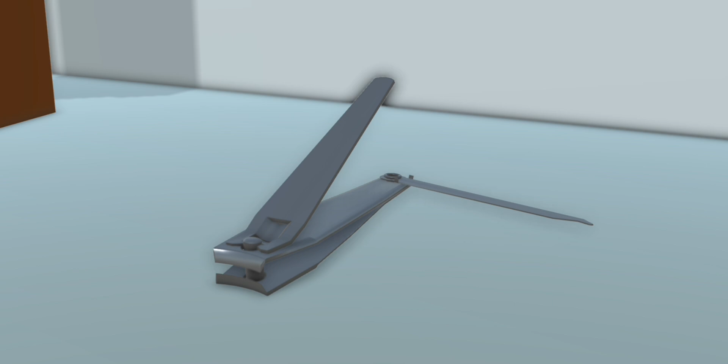This is a lever-type nail clipper, or simply known as the nail clipper. Every neighborhood has this small tool, and everybody knows what it's used for, and how to use it. But have you ever wondered how this simple tool works so efficiently? Today, let's explore the genius behind the lever-type nail clipper, from its design to the hidden mechanism.

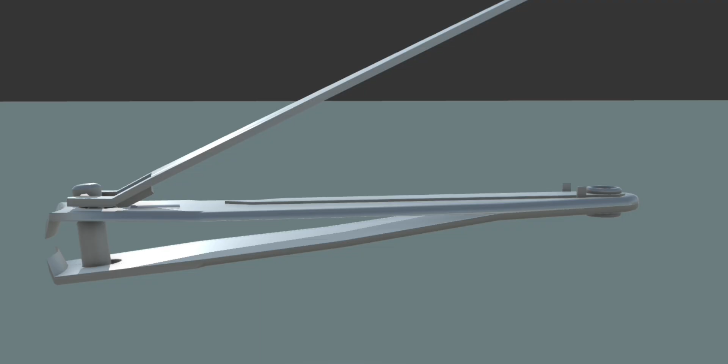A lever-type nail clipper is a common personal grooming tool, used to trim fingernails and toenails. It uses a lever mechanism to apply pressure on the cutting blades, making it easy to cut nails with a small amount of force. Here's a breakdown of its main parts and how it works.

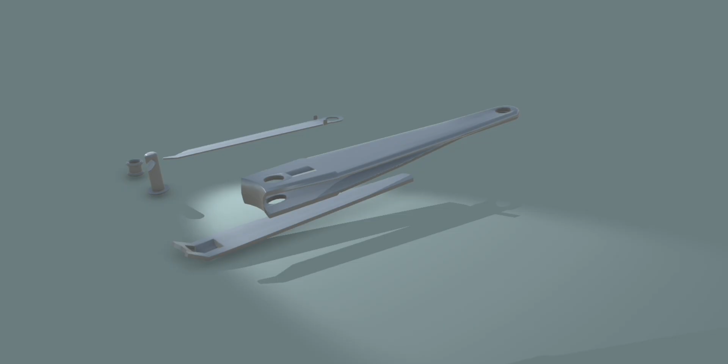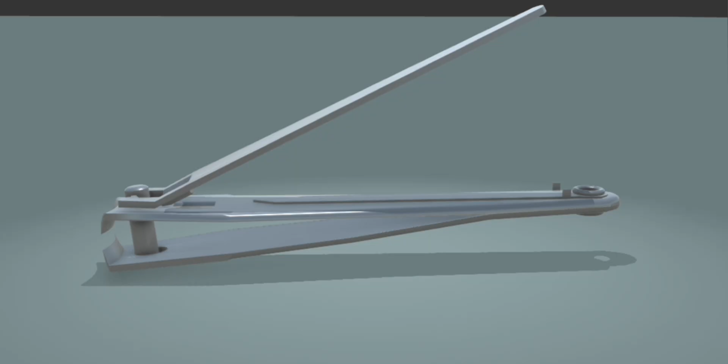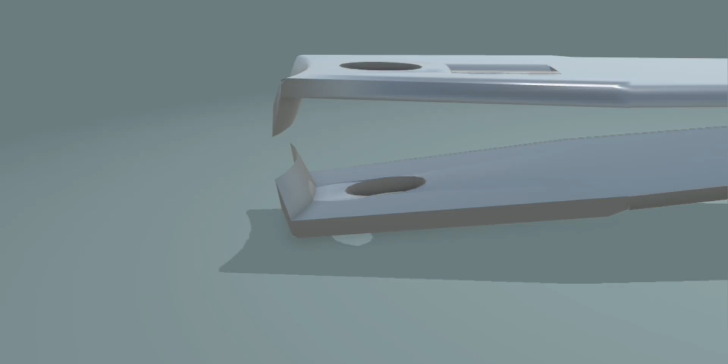Here, we have the base frame, the lever, the nail file, the pin, and the shaft. Now let's start with the base frame. The base frame comprises two main parts: the upper clipper arm and the lower clipper arm. The upper clipper arm can move up and down due to the force coming from the lever when you press it. This is also the movement that clips your nails between the two sharp blades and cuts them cleanly.

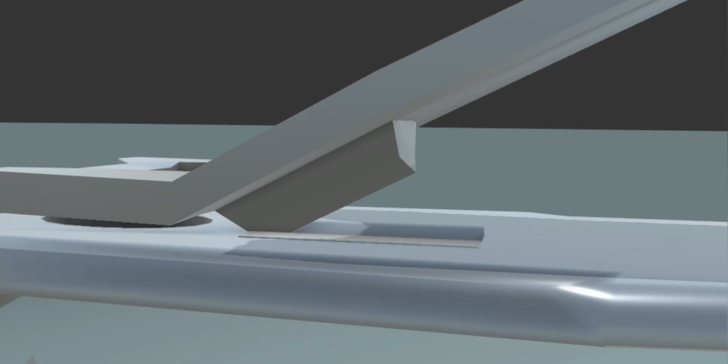At the top of the upper clipper arm, you'll see a rectangular groove on it. This groove helps the proper placement and stabilizes the lever fulcrum, so that it will not slide left or right every time you press the lever. The lower clipper arm is stationary, it doesn't move up or down like the upper clipper arm does. Its main purpose is to provide flexibility strength to the upper clipper arm, cutting support with its own blade, and to double the structural durability.

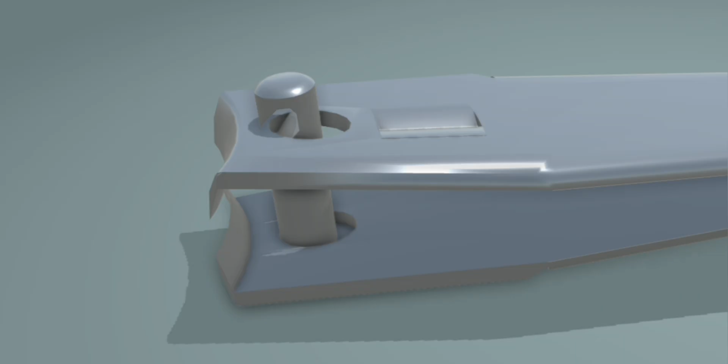These two arms combine facing each other and become the main body that houses the upper blade and the lower blade. Each has one hole for the pin placement, and often includes a small hole at the end for a keychain or chain attachment. Note that some lever-type nail clippers' designs have a solid base frame. That makes them more durable and heavier.

And for this lever-type nail clipper, the two arms are fixed permanently, mostly welded together from manufacture, and you should not separate them with force when you're planning to disassemble its parts. It may break one of the arms and will no longer be usable.

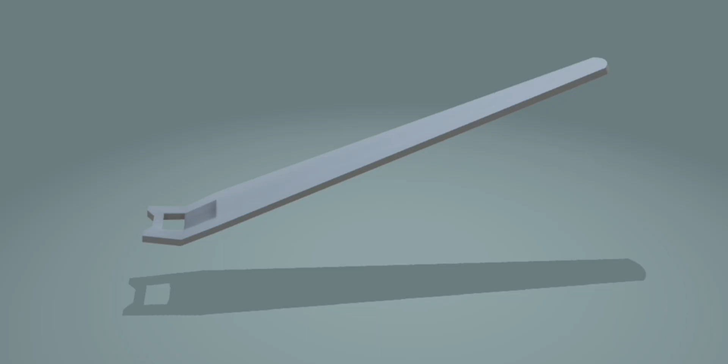Next is the lever, or handle. The top part you press down acts as a lever to multiply the force applied by your fingers. It's usually mounted on a pin and can rotate to lie flat when not in use. The lump up here is called an upset portion, the one that positions itself on the groove at the top of the upper clipper arm.

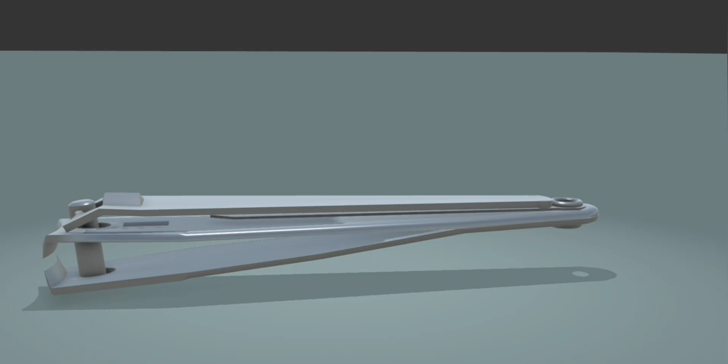Next is the pin, sometimes called rivet or pivot. The pin is a small, usually cylindrical, solid steel rivet shaped like a hook, and locks the lever and body together. It acts as a pivot for the lever, allowing downward pressure to be transferred to the cutting blades. It also allows the lever to rotate 360 degrees, and the blades to open and close.

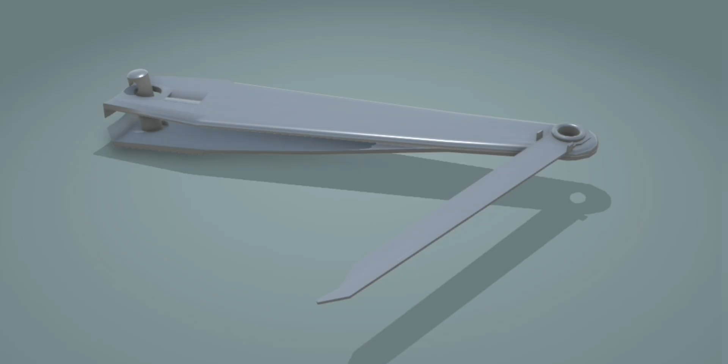And last is the nail file, or the filing surface. This part is optional, but some nail clippers have a small metal nail file attached underneath the lever. It is placed beside the keychain hole at the rear end of the base and locked using the hollow cylindrical shaft with punches at both ends during the manufacturing process. It can also rotate 360 degrees for your preference, and is used to smooth the edges of nails after clipping.

So, we all know now that when we press down on the lever, it pivots on the pin, pushing the upper cutting blade down towards the lower blade. The two blades meet and cut through the nail cleanly. Releasing the lever resets the blades for the next cut. But how exactly does it work, and what's the science behind it?

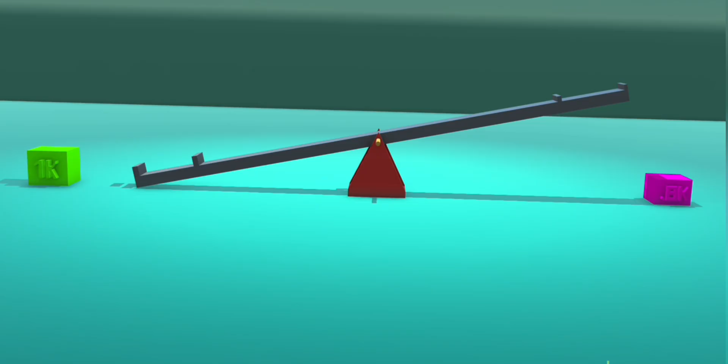Well, nail clippers primarily utilize a lever mechanism to cut nails. A lever mechanism is a simple machine that uses a rigid bar, or lever, pivoting around a fixed point, or the fulcrum, to amplify force, allowing a smaller input force to produce a larger output force. Levers are categorized into three classes based on the position of the effort, load, and fulcrum: the first class lever, the second class lever, and third class lever.

In a first class lever, the fulcrum is located between the effort and the resistance. The effort is applied on one side of the fulcrum and the resistance, or load, on the other side. For example, a seesaw, a crowbar, a pair of scissors, a balance scale, a pair of pliers, and a claw hammer. With the fulcrum in the middle, the lever's mechanical advantage may be greater than, less than, or even equal to 1.

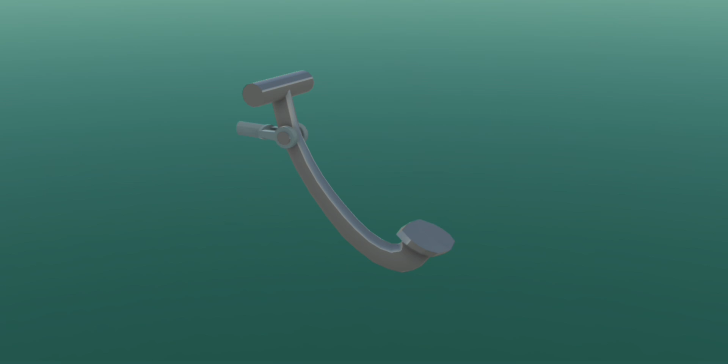In a second class lever, the resistance or load is located between the effort and the fulcrum. The effort is applied on one side of the resistance, and the fulcrum is located on the other side. For example, a wheelbarrow, a nutcracker, a bottle opener, a wrench, and the brake pedal of a car. Since the load arm is smaller than the effort arm, the lever's mechanical advantage is always greater than 1. It is also called a force multiplier lever.

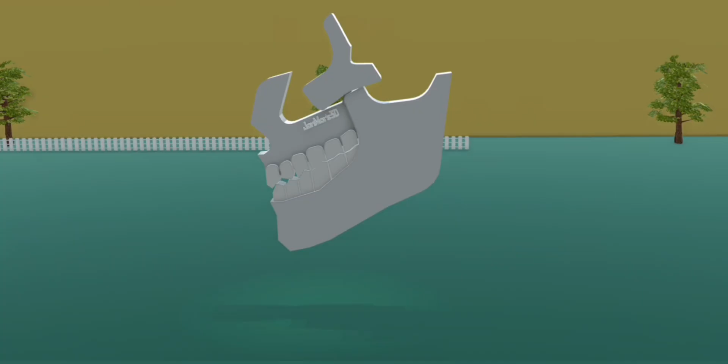In a third class lever, the effort is located between the resistance and the fulcrum. The resistance or load is applied on one side of the effort and the fulcrum is located on the other side. The example tools for this type of lever are a hoe, a pair of tweezers, a pair of tongs, a fishing rod, and the mandible of a human skull. Since the effort arm is smaller than the load arm, the lever's mechanical advantage is always less than 1. It is also called a speed multiplier lever.

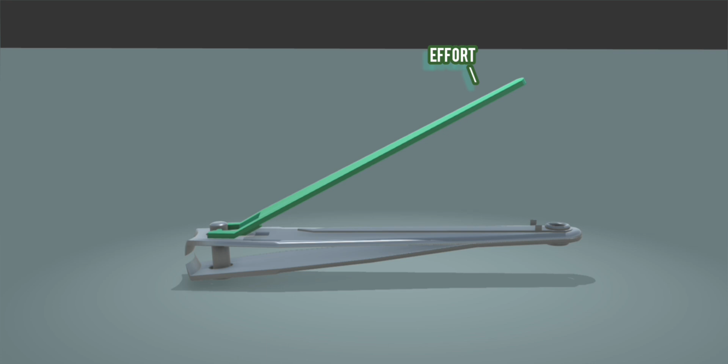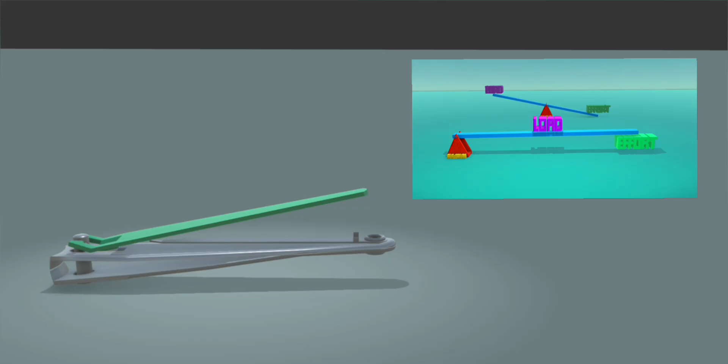And going back to our nail clipping tool, can you guess which class of lever mechanism it's using? First, we need to observe that the nail clipper actually consists of two moving components when cutting nails. Let's observe the location of effort, resistance, and fulcrum in the upper component. Because resistance is in the middle, this upper component of the nail clipper is a class 2 lever. How about the lower component? Since effort is in the middle, this lower component of the nail clipper is a class 3 lever. And that concludes the nail clipper is the combination of a class 2 and a class 3 lever.

Now we know. It may look simple, but this little tool is a masterpiece of design. Such an incredible mechanism, isn't it? Now you know what's really going on every time you trim your nails.